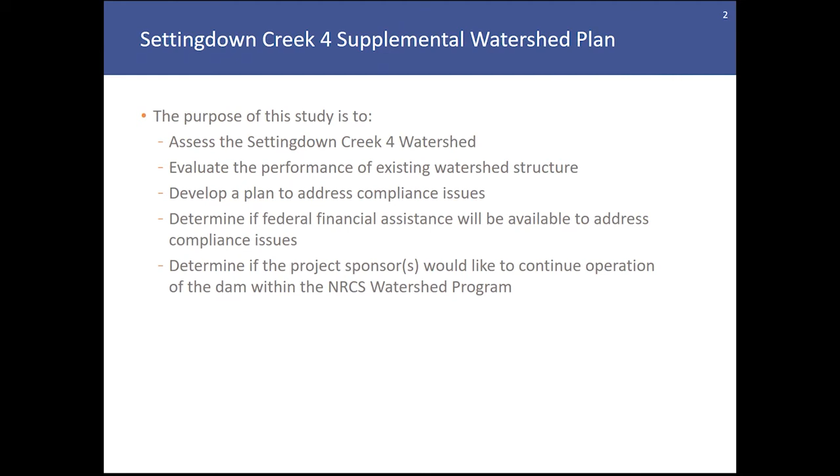A supplemental watershed plan is being prepared for Settingdown Creek Dam number 4. The purpose of the study is to assess the Settingdown Creek 4 watershed, evaluate the performance of the existing watershed structure, develop a plan to address compliance issues, determine if federal financial assistance will be available to address the compliance issues, and to determine if the project sponsors would like to continue operation of the dam within the NRCS watershed program.

As part of the planning study, a public participation plan is being utilized to inform the public and watershed stakeholders of the planning effort. The planning study requires a series of public meetings. Two public meetings have been held for this project so far. The first and second public meetings included presentations discussing a brief history of the NRCS watershed program, a brief history of dam safety, considerations for dam design, operation, and maintenance, an overview of the Settingdown Creek watershed and the specific dams included in this planning study, and an opportunity for the public and participants to submit questions and comments to identify scoping topics and project opportunities and concerns.

The second public meeting introduced potential rehabilitation alternatives for the dam. The first public meeting was presented on the Schnabel YouTube page between August 7th and August 17th, 2020, and the second public meeting was posted from December 18th to January 4th, 2021. Please note that the first and second public meeting presentations have been reposted to Schnabel's YouTube channel for those interested in viewing the presentations and the content described above.

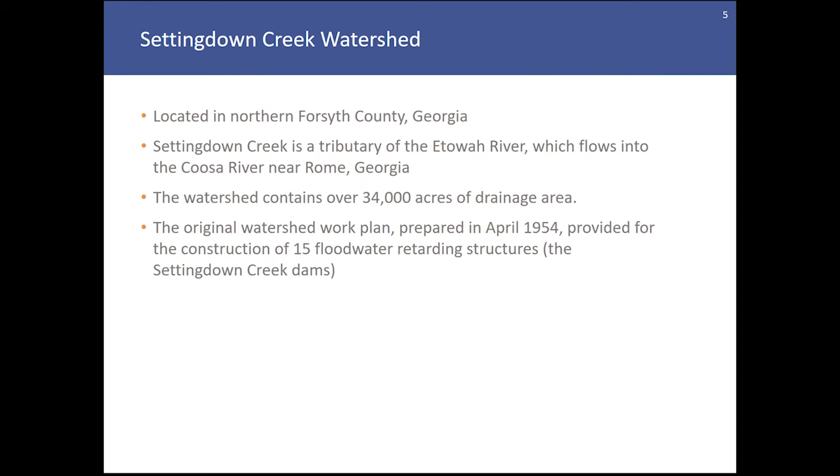The Settingdown Creek watershed is located in northern Forsyth County, Georgia. Settingdown Creek is a tributary of the Etowah River, which flows into the Coosa River near Rome, Georgia. The watershed is approximately 34,000 acres, and the original watershed work plan, prepared in 1954, provided for the construction of 15 floodwater retarding structures, known as the Settingdown Creek dams.

This slide shows a delineation of the Settingdown Creek watershed at its confluence with the Etowah River. The Etowah River is located to the left of this view, or to the west. For reference, Georgia 400, the highway, is indicated by the blue line that runs generally north and south near the right or east side of the watershed.

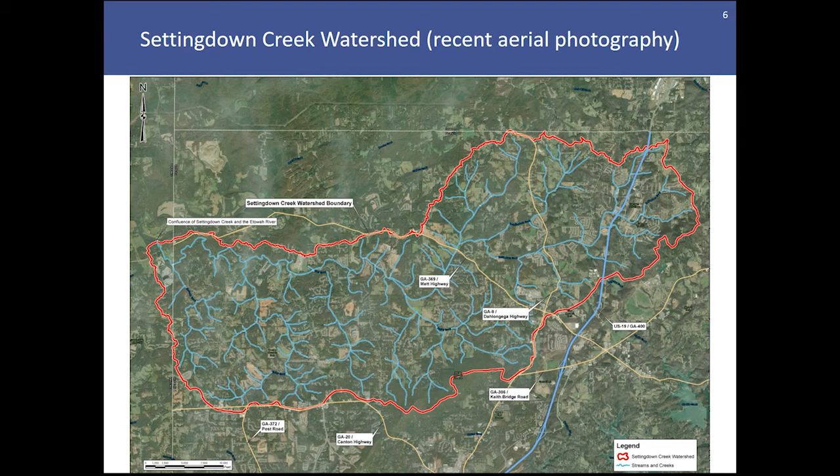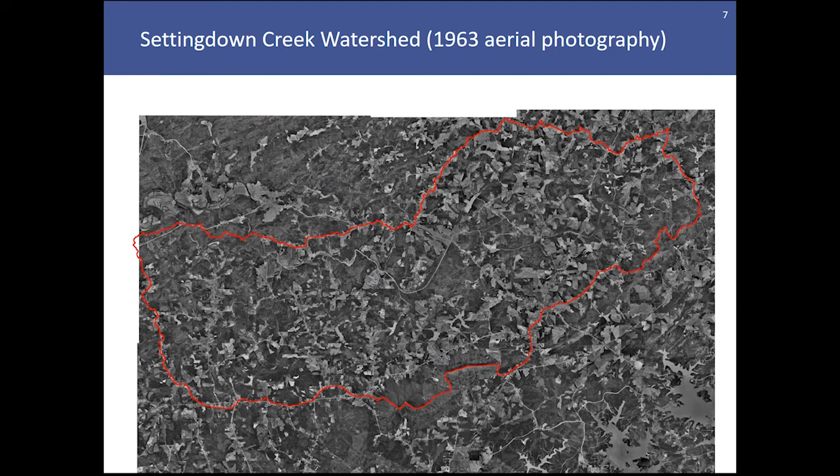Here's a delineation of the watershed overlain on aerial photography taken from the early 1960s. As you can see, most of the land uses back in the 60s, right after these dams were constructed, consisted mostly of forested or undeveloped lands. Over the past 60 years, there have been several changes in the watershed with regard to development, residential and commercial construction, and things of that nature.

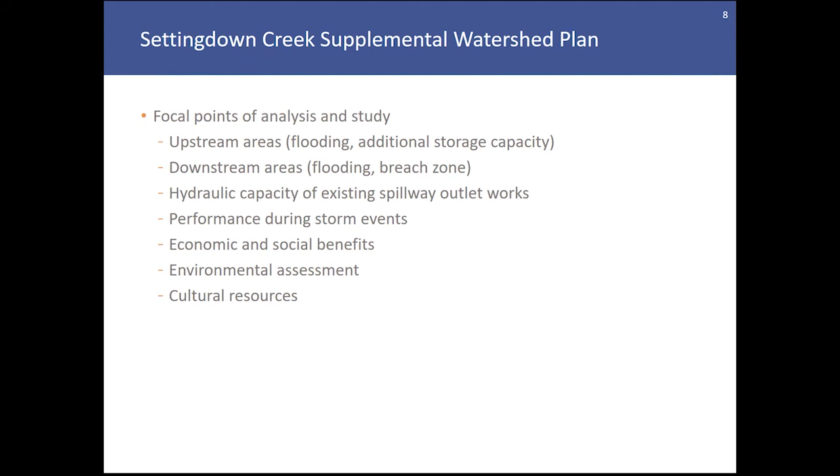The focal points of analysis and study for the planning effort include a study of the upstream areas of the dams with regard to flooding and potential need for additional storage capacity, downstream areas with regard to flooding and potential breaches of the dam, an evaluation of the hydraulic capacity of the existing spillway outlet works, the performance of the dams and spillways during a variety of storm events, the economic and social benefits provided by the dam, an environmental assessment including identification of potential wetlands and or species of concern, and a cultural resources study to identify any archaeological or historic items of concern in the vicinity of the project.

With regard to Settingdown Creek Dam number 4, the dam meets Georgia Safe Dams program criteria to be considered a Category 1 high hazard potential dam. This means that failure or improper operation of the dam would likely result in the loss of human life. The dam needs an operating permit from the Safe Dams program. Previous assessments indicate that the dam does not comply with current SDP rules and requirements.

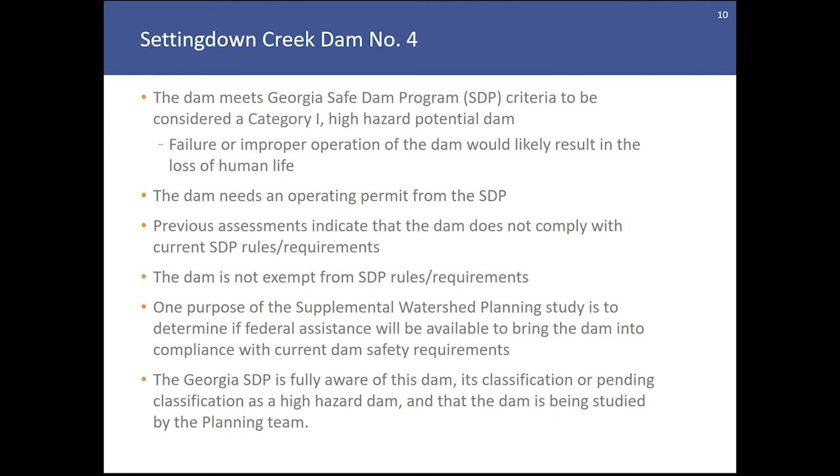The dam is not exempt from SDP rules and requirements. One purpose of the planning study is to determine if federal assistance will be available to bring the dam into compliance with current dam safety standards. The Georgia Safe Dams program is fully aware of this dam, its classification or pending classification as a high hazard dam, and that the dam is being studied by the planning team.

Original design features of Settingdown 4 include that the dam was not originally designed as a high hazard dam. The purpose of the dam was to mitigate flooding of downstream areas, and an anticipated secondary purpose was sediment accumulation and storage.

The dam currently has a reinforced concrete principal spillway consisting of a riser structure in the lake and a pipe or conduit that conveys water from the lake through the earthen embankment to the outlet channel downstream of the dam. The dam also has a vegetated earthen auxiliary or emergency spillway located in the left abutment, to convey flows associated with low frequency, high intensity storm events.

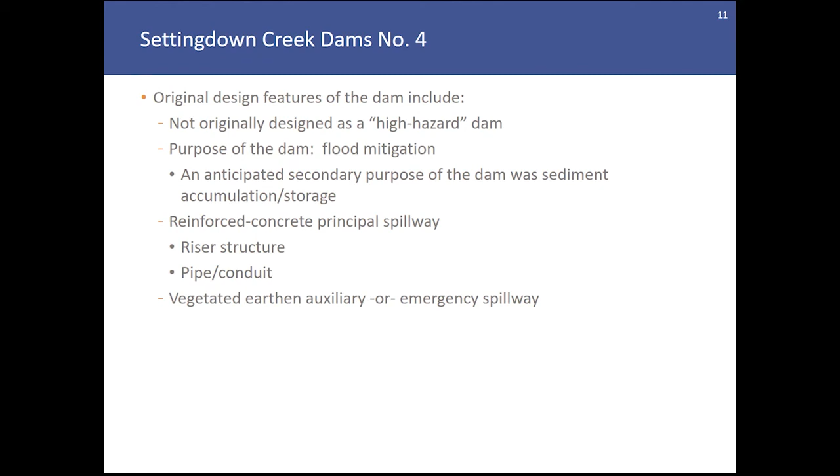The dam is located east of Georgia 400 and south of Hampton Park Drive. It was constructed in 1956 and is between 64 and 65 years old. It appears on the National Inventory of Dams and has a surveyed height of approximately 35 feet. The drainage area of the dam is approximately 564 acres, or almost 9/10 of a square mile, and the design total storage capacity of the dam is 307 acre feet.

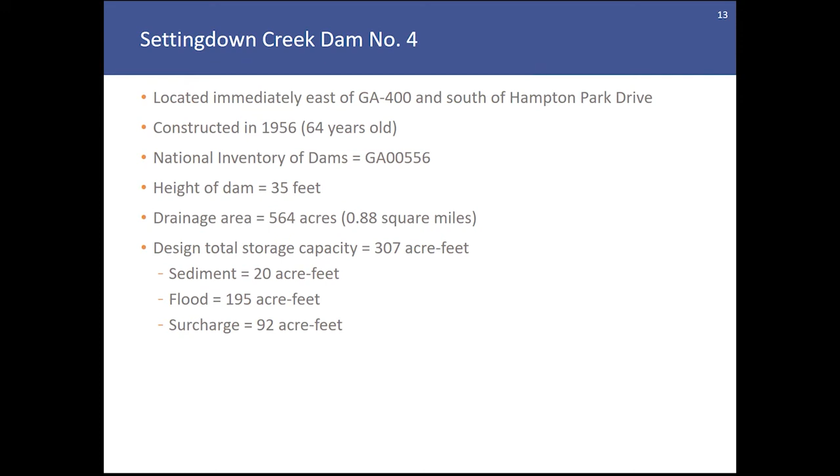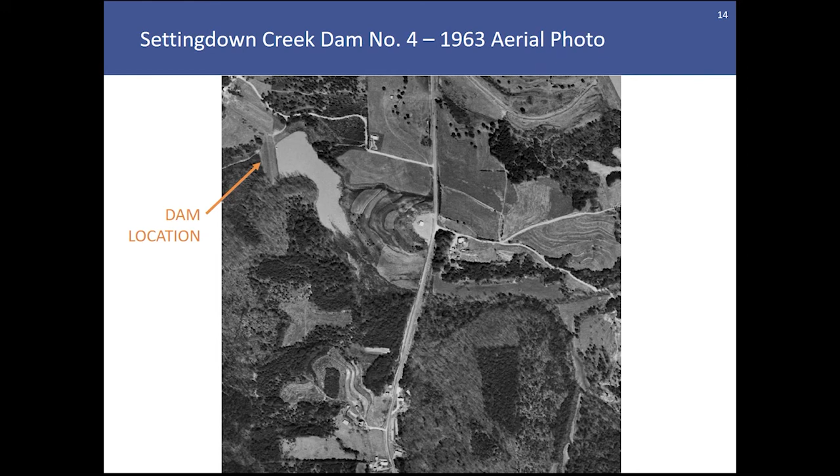Here's an aerial photo taken in the early 1960s, relatively soon after the construction of the dam. And here's a more current aerial photo of the dam and lake.

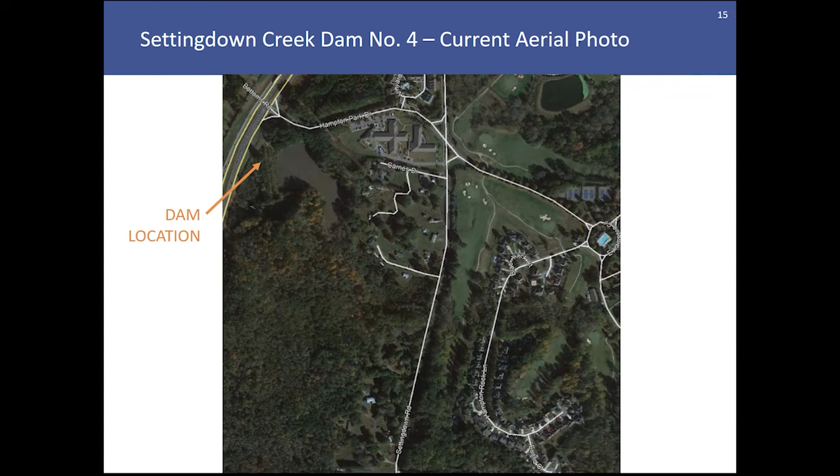For this dam, flows pass through the principal spillway pipe and riser, or through the auxiliary spillway into culverts, and flows are conveyed beneath Georgia 400 from the east side to the west side via these culverts.

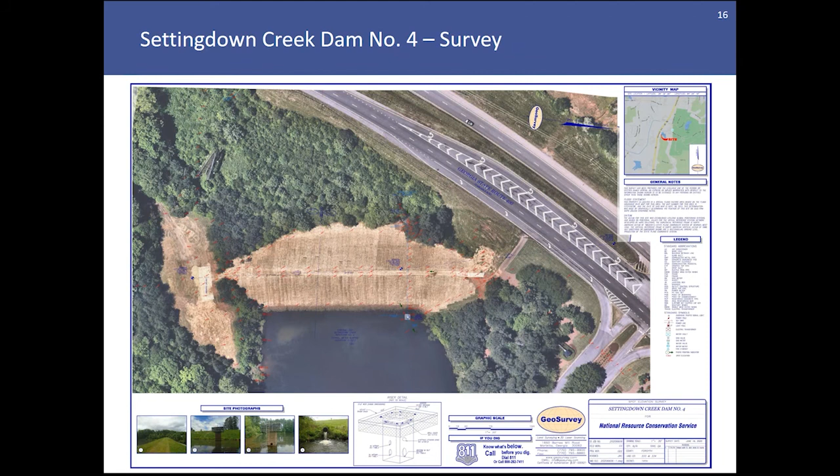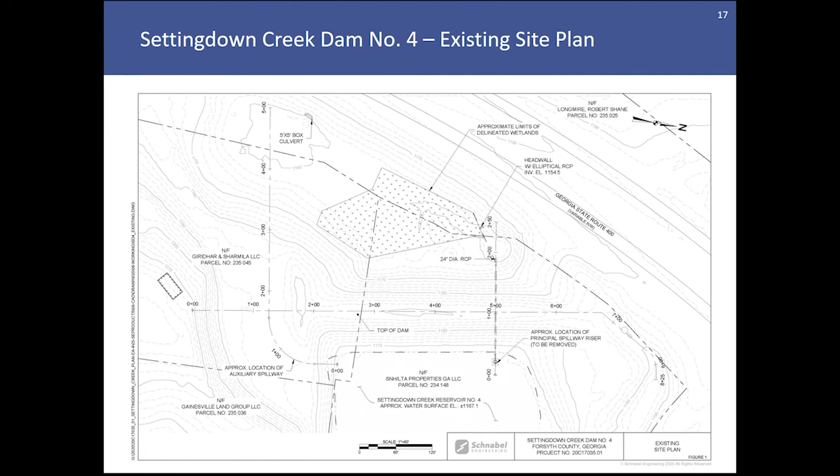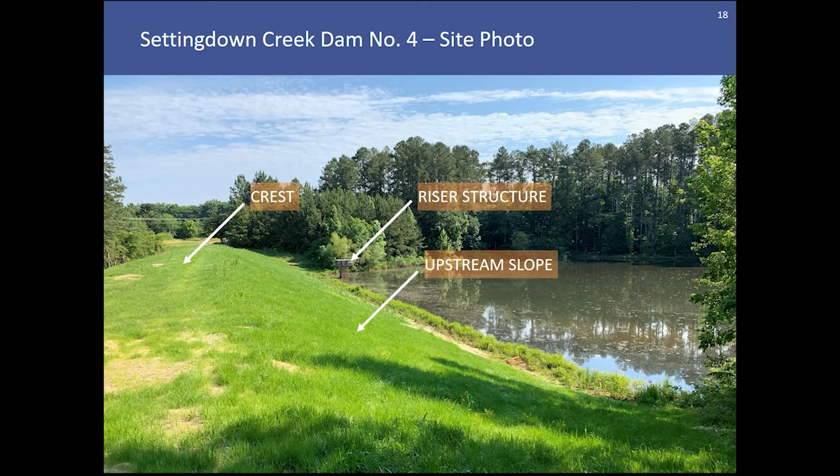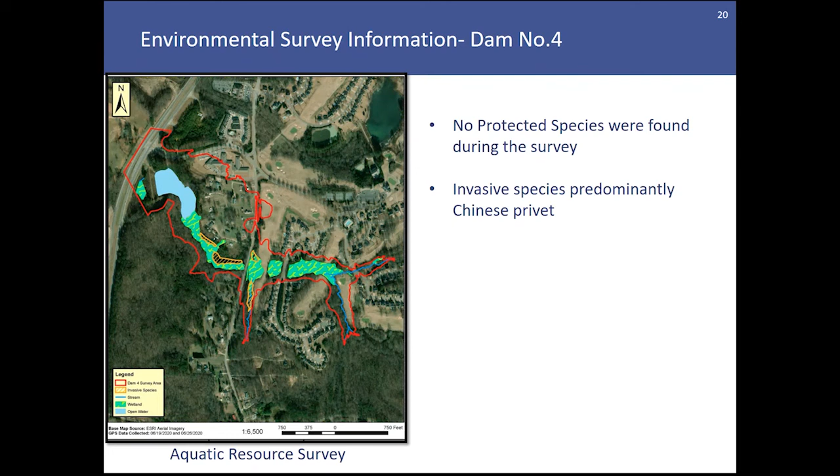The dam, being 61 years old, is the only historic resource identified in the project vicinity. It is eligible for the National Register of Historic Places based on its age, but our cultural resources team has not recommended that it be listed, given that the dam doesn't have any exceptional feats of engineering design or construction, and there are several similar dams located across the United States and Georgia that perform the same function.

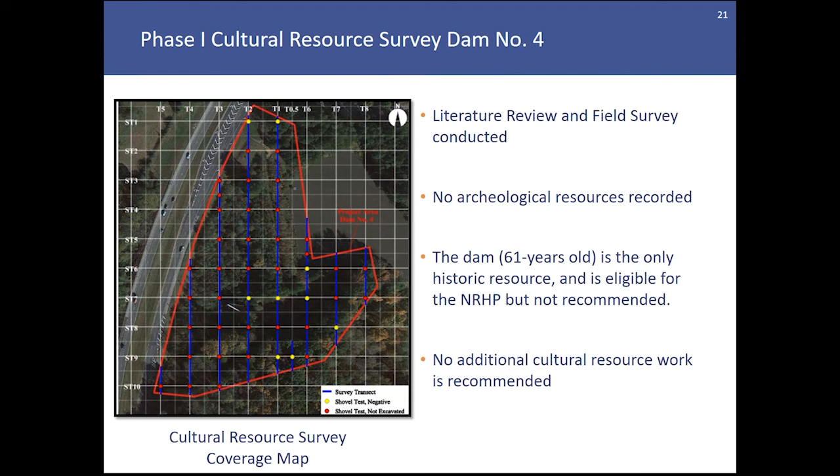As a result of the phase 1 survey, no additional cultural resources work has been recommended.

As part of the planning study, downstream flooding analyses, including breach analysis and inundation mapping, were performed. In the event of a hypothetical breach of Settingdown Creek Dam number 4, there are several structures that would be impacted. This map shows the extents of a sunny day breach of the dam and the locations of potential impacted structures identified downstream of the dam.

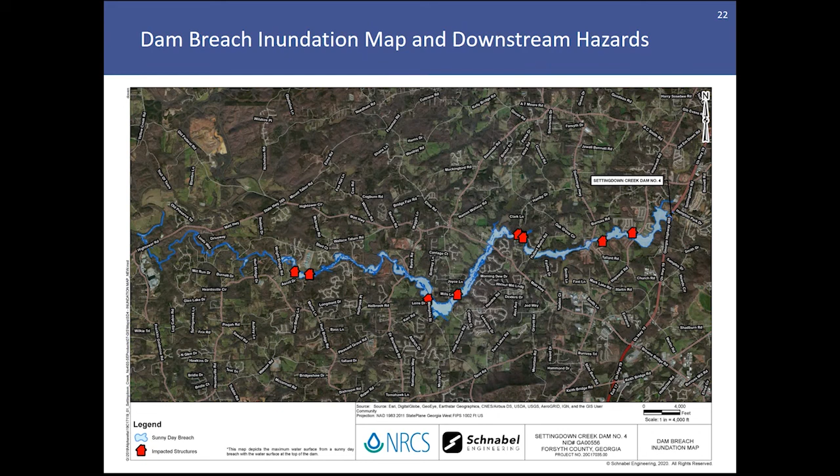In addition to the dam breach analysis, downstream flood analyses were also performed for the 2-year through 500-year storm events. This map indicates the extents of the 100-year and 500-year flooding from the dam in the watershed beyond the downstream extent of the dam, and also the locations of impacted structures that would have flood waters over the lowest finished floor elevations of those structures.

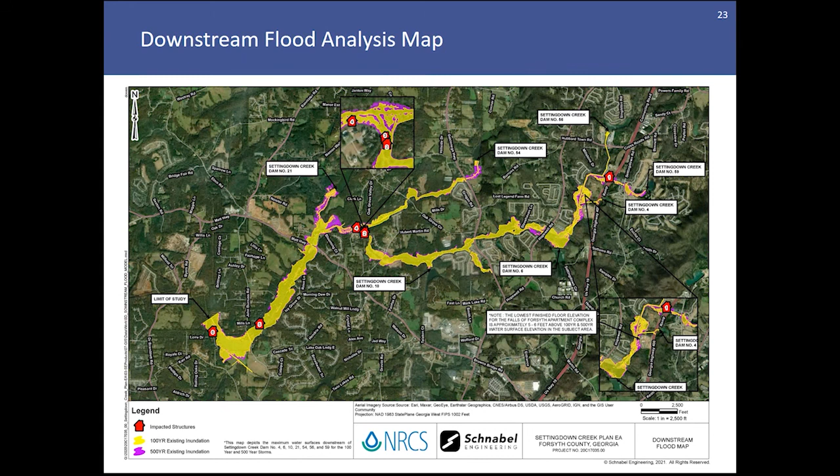As you can see, there are several homes or structures impacted as a result of flooding upstream of the dam. These structures were likely constructed after the dam was installed. There are approximately 7 structures impacted by the 100-year storm upstream of the dam, and 4 more structures that would be impacted in addition to the first 7 for more intense storm events.

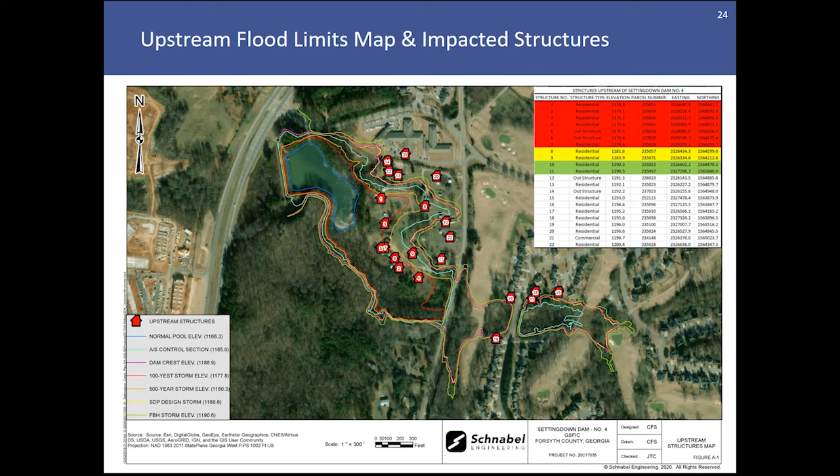Several deficiencies were identified with the existing dam. As stated previously, the dam was recently cleared last summer in 2020. An underwater inspection of the riser structure concluded that portions of the slide gate assembly are worn or corroded, and portions of the riser concrete are cracked or spalled. A closed circuit television inspection of the principal spillway conduit was performed in late 2020 or early 2021, and the results showed that the interior of the conduit is in acceptable condition.

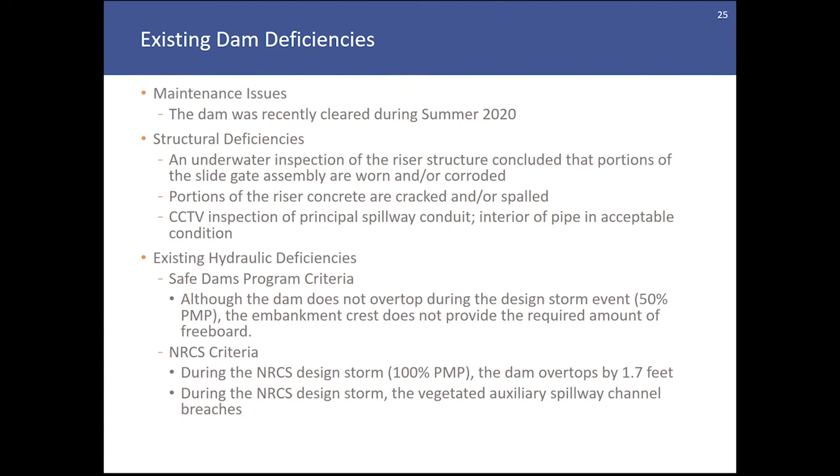With regard to hydraulic deficiencies, the dam does not overtop during the Safe Dams program design storm event, which is 50% of the PMP, but the embankment crest does not provide the required amount of freeboard for that event. Regarding the NRCS hydraulic criteria, the dam does overtop by about 1.7 feet during the freeboard hydrograph storm event, also considered 100% of the PMP, and the vegetated auxiliary spillway channel breaches during that storm event, which is a deficiency.

During the second public meeting, a series of rehabilitation alternatives were presented. We have shortlisted 3 alternatives for this presentation: the no action alternative, a decommissioning alternative, and a future with federal investment alternative for the dam.

The no action alternative is also referred to as the future without federal investment alternative. This assumes that the sponsor would be responsible for funding 100% of the rehabilitation effort for this dam. The dam would not need to be upgraded to NRCS criteria, which are more stringent than the Georgia Safe Dams program criteria for this particular dam. This alternative would either be the permanent breaching of the dam or the rehabilitation to state criteria, and the option presented is based on the total installation cost associated with either keeping the dam in service or breaching the dam.

A decommissioning alternative is required to be studied as part of the planning process. This would be a complete removal of the earthen embankment, stabilization of the excavated channel and resulting lake bed, and would also require consideration for downstream properties which would be prone to more frequent flooding after the dam is removed.

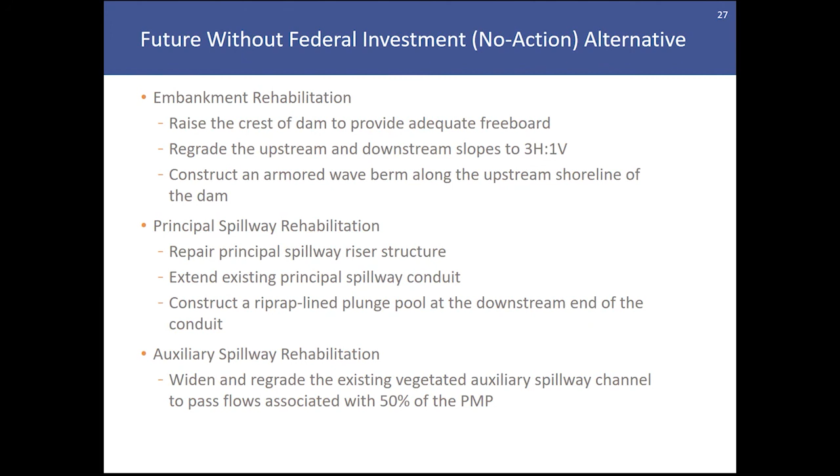The principal spillway rehabilitation would involve repairs to the principal spillway riser structure, an extension of the existing principal spillway conduit, and the construction of a riprap lined plunge pool at the downstream end of the conduit. The auxiliary spillway rehabilitation would involve slightly widening and regrading the existing auxiliary spillway to pass flows associated with 50% of the PMP, which is the Georgia Safe Dams program design storm for this dam.

For context, the 50% of the PMP is approximately 15 inches of rain over the course of 6 hours. So it is a more intense storm event than the 100-year storm.

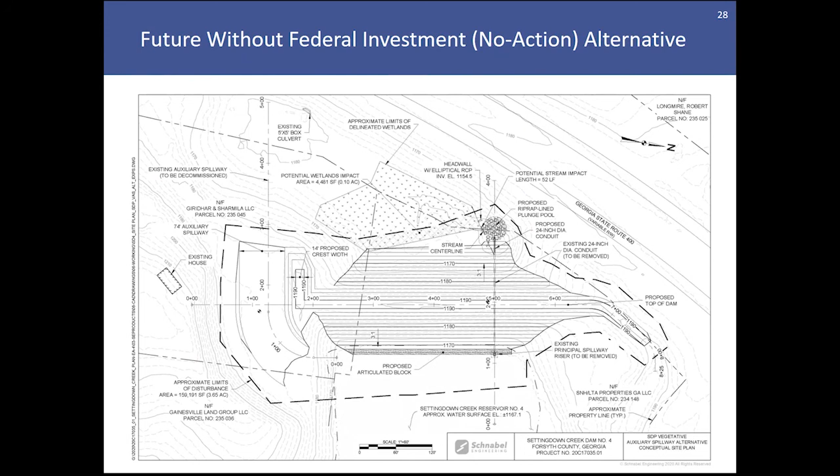We're proposing the use of articulated block to limit the footprint of earthwork required to install a berm, and the riprap lined plunge pool that's proposed is also located at the downstream end of the principal spillway conduit.

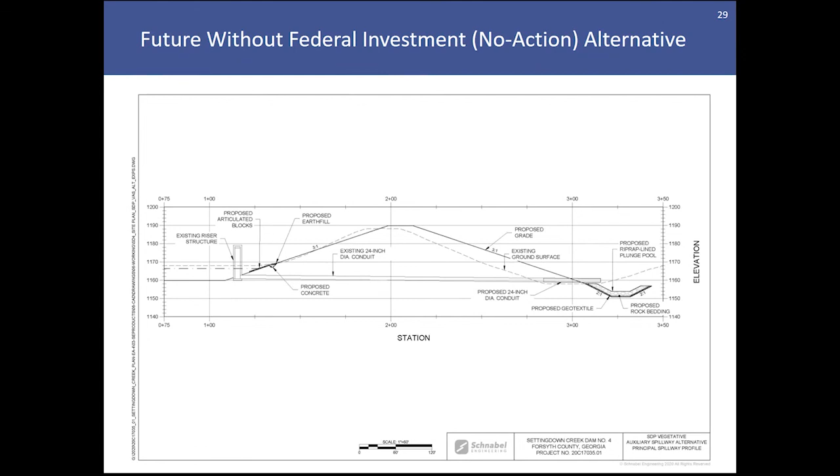The decommissioning alternative would involve removing the dam so that it would no longer be classified as a dam, and it is more involved than simply breaching the dam. We're not talking about just removing a portion of the dam. It would be the majority, if not all, of the earth fill used to construct the earthen embankment.

This would also involve reconnecting the grade of the original floodplain, stabilizing the lake bed with permanent vegetation, and stabilizing the primary channel through the footprint of the old dam with riprap.

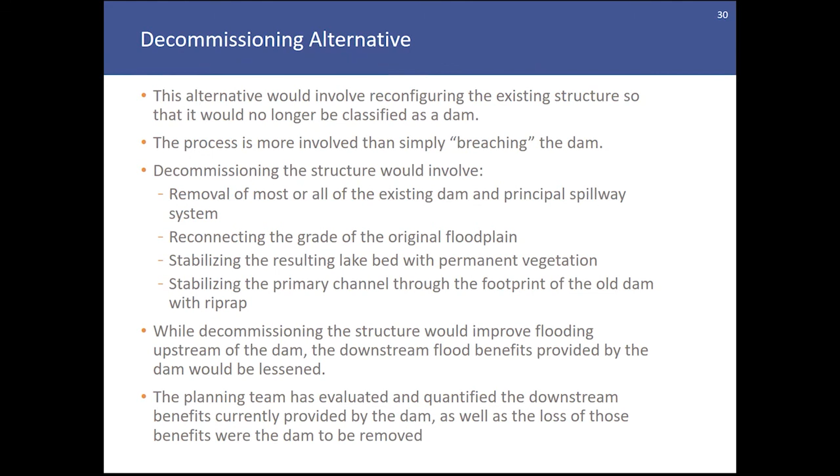Decommissioning the structure would improve flooding upstream of the dam, but the downstream flood benefits would be lessened as a result. The planning team has evaluated and quantified the downstream benefits currently provided by the dam, as well as those benefits if the dam were to be removed.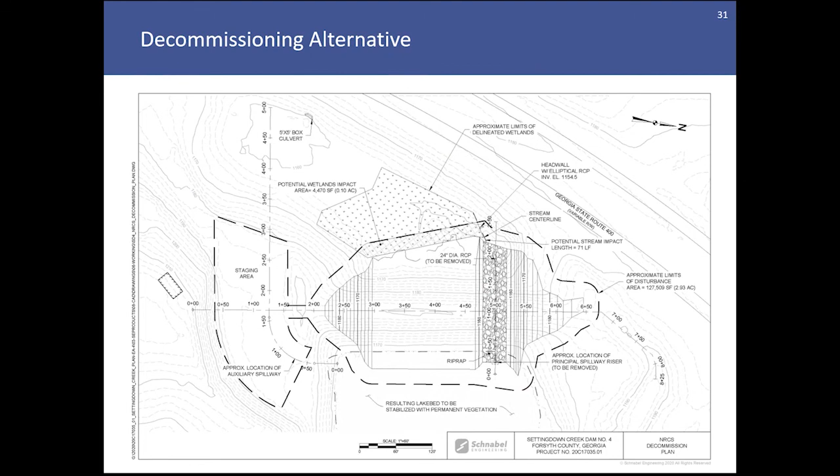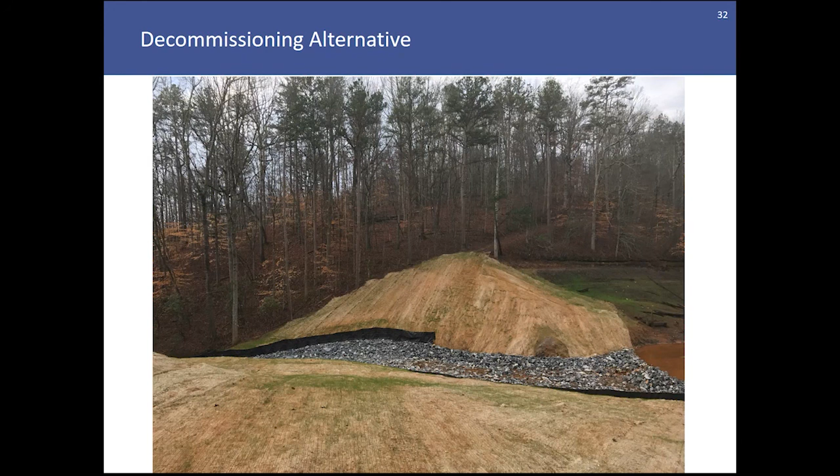Here's a photograph with an example of what a decommissioning alternative would look like. You can see that the slopes have been laid back and vegetated, and the primary channel through the dam is stabilized with riprap.

The last alternative that we'll talk about today is the future with federal investment alternative. This would be a full rehabilitation of the dam to meet NRCS requirements. It would involve raising the crest of the dam to the current maximum water surface elevation associated with the design storm event, regrading the upstream and downstream slopes to 3:1, constructing a riprap lined wave berm along the upstream shoreline of the dam, and closing off or decommissioning the existing vegetated auxiliary spillway.

The principal spillway would be removed and replaced. The riser structure would be removed and replaced, and the principal spillway, given its condition, could be reutilized.

An extension of the principal spillway conduit would be necessary. This alternative would also involve the construction of a plunge pool at the end of the conduit.

To pass the design storm event, a concrete spillway in the form of a reinforced concrete labyrinth spillway would be required. The total spillway width would be 28 feet. The spillway would be constructed over a portion of the existing earthen embankment, with consideration given to providing access to both sides of the spillway for long-term maintenance of the dam. The spillway would include a concrete chute and a reinforced concrete stilling basin and riprap lined apron to dissipate energy associated with higher flow events through the spillway.

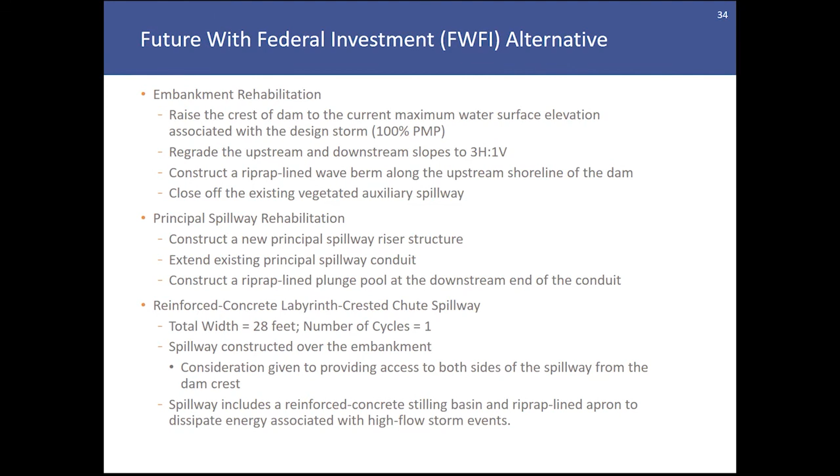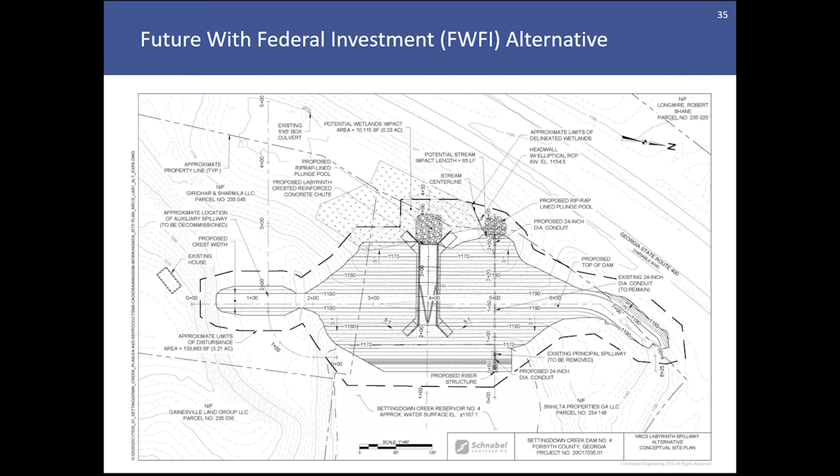Here's a site plan showing what this alternative would look like. You can see that the earth spillway that breaches during the design storm would now be decommissioned. The concrete spillway would provide the armoring necessary to pass the flows associated with the design storm event, and the dam would be raised, with the footprint growing a little as a result. Here's a profile view of what the labyrinth spillway would look like.

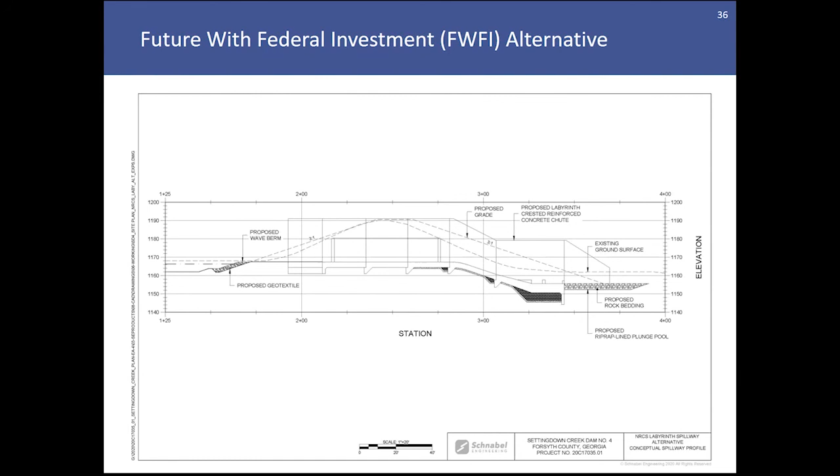The labyrinth weir is located in the middle of the screen. It would rest on relatively thick concrete slabs, and flows over the labyrinth spillway would be conveyed down a 3:1 chute and into a stilling basin. Beyond the stilling basin, there would be a riprap lined apron or dissipation area.

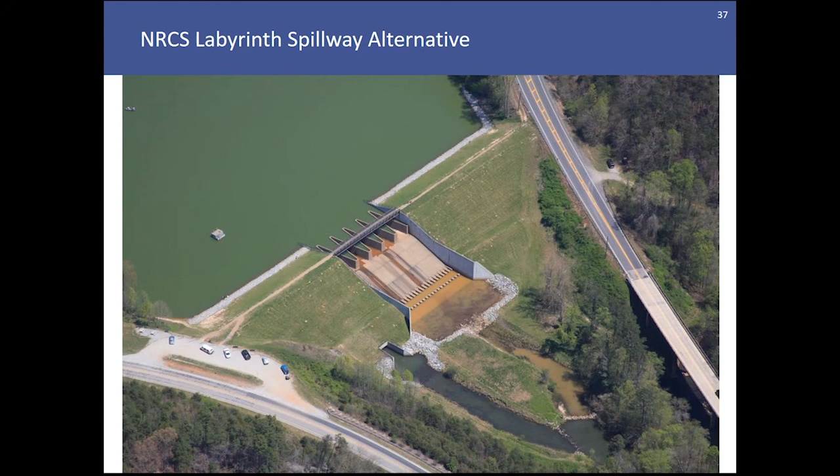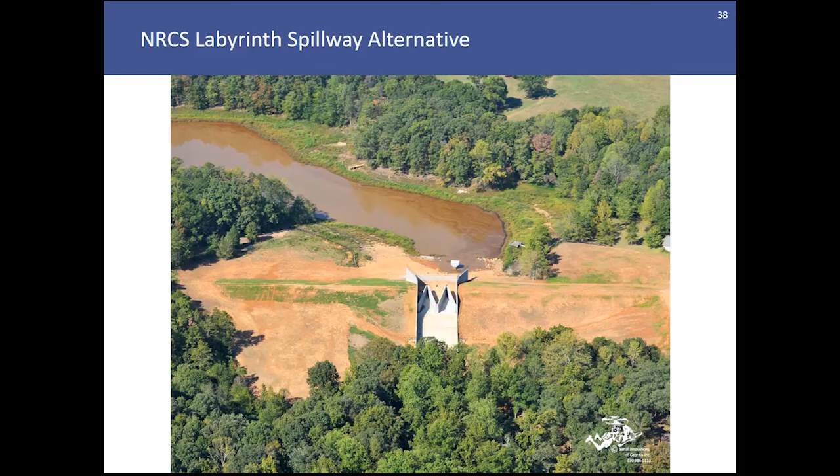As part of the planning process, the planning team has had several discussions and meetings with the project sponsors. As a result of the analysis performed to date - the environmental analysis, economic analysis, flooding studies, and the performance of the dam - the locally preferred alternative to address the deficiencies with this dam is the future without federal investment alternative, or no action alternative.

The dam is relatively close to meeting the hydraulic and structural requirements of the Georgia Safe Dams Program. So many of the requirements needed to meet SDP, the Georgia SDP requirements, are relatively minor.

There would need to be repairs to the principal spillway riser structure, an extension of the principal spillway conduit, and the installation of wave protection on the upstream slope. The dam would need to be raised slightly to provide an adequate amount of freeboard during the half PMP, and the auxiliary spillway channel would need to be regraded and slightly widened to pass that 50% PMP storm event without the dam overtopping.

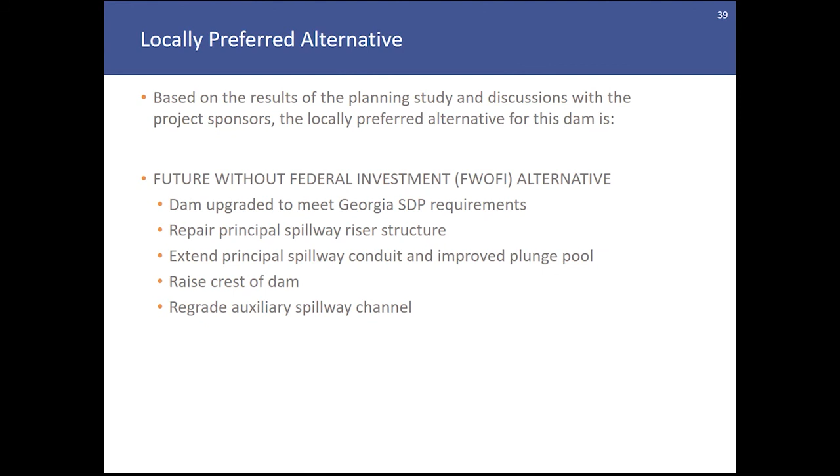As part of the planning process, public participation is very important and is invited. We would like to give you, the viewer, and other project stakeholders opportunities to submit questions, concerns, and comments regarding the development of the plan, the rehabilitation alternatives that have been put forward, the locally preferred alternative, and any other questions or comments that are of concern to you.